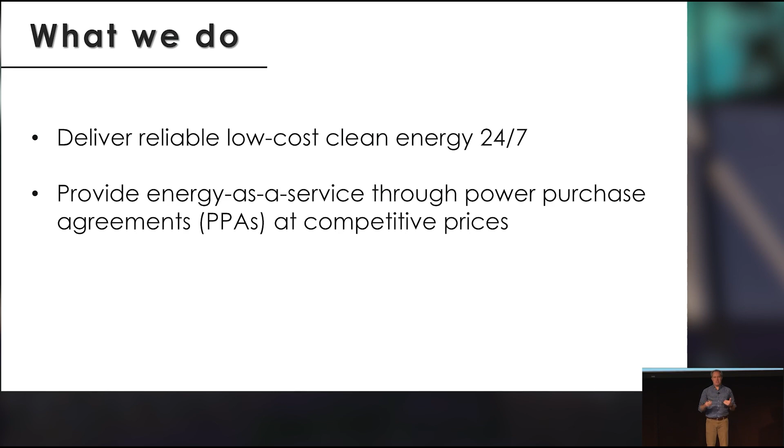At the, I don't know if I'd say 100,000 foot view, maybe that's a way to think about this because it's a multi-billion year perspective. What we're working on is literally a technology that's been demonstrated and proven that can tap into known reserves of heavy metals that we can access on this planet, in other words, uranium and thorium, and power the entire planet's energy needs for billions of years, for the rest of the durable lifetime of the planet till the sun consumes it or makes it uninhabitable. That's pretty dang cool, right? We don't need a breakthrough. This has been done. So it's just a matter of actually execution. Now, that's a little bit reductionist, but that is the mission that motivates us and what we're working towards.

So what got me to fall in love with this, I talked about, was energy density. Just to manifest 50 million times, cool, but to manifest this a little more clearly, if you had a golf ball of uranium metal, that would have enough energy content in it with what we're doing to power your entire life's energy needs. Just a golf ball, right? And this stuff is pretty abundant material, actually. It's not that rare. So it's a hugely powerful source that also sets the stage for this to be such a competitive advantage we have from a technological perspective, from a density perspective. My view is, generally speaking, humans have tended to climb density curves in everything we do. Well, at least when we make progress. Maybe there's short starts and stops where we don't, but usually that's what we do. Semiconductors are obviously probably the fastest growth we've seen of that.

But probably the only other thing that's rivaled that is the shift from the electron cloud, which is what we get our energy from for everything else, into the strong nuclear force. That's in the nucleus, which is what nuclear taps into.

To me, the way I think about that, that manifests in what I think is the most fundamental metric for energy economics, which is life cycle material usage. How many kilograms of concrete, steel, copper, fuel, and so on do you need per gigawatt hour of energy you produce over its life cycle?

If you compare across all energy sources, fission by far requires the least. In fact, you really have to zoom in to see how much better it is than everything else. And that's great. In fact, it even beats fusion. That's not to be super critical of fusion, it's just fission is a really, really easy way to make heat, and you can harness it. So it really is one of the most sustainable energy sources there is.

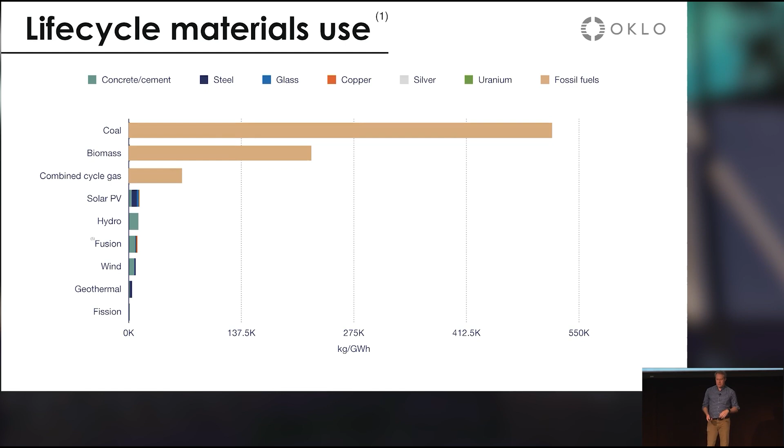And scalable, and therefore economic, is how I look at it. So that's what got me to fall in love with it, and that's what got us to work on this. So I talked about this before, I kind of talked about the macro, setting the stage.

When we started the company, we really focused on targeting three main areas where we saw huge opportunities. One was the power sales model - that's a business model different than what's been done before. The other is technology, and the other is size. So quickly working through those.

Typical nuclear that we had seen, and to date pretty much what everyone else does in the nuclear space on the reactor design side, is they design a nuclear reactor to about 80% completion, design the rest of the power plant to about 50% completion, maybe a little more. And then they go to their customers or prospective customers and ask them to pay a couple hundred million dollars for the customer to then take over all the work.

For the customer to do the rest of the design, to site it, to permit it, to own it, build it, operate it, all those things. That's really highly frictional and is part of the reason nuclear has not had a good time finding new markets to deploy into and growing even within utility markets. So our view was to say, let's make it easy to buy what people want, because people really do want the reliable, clean power that nuclear produces.

So we decided to focus on a power sales model where we design, own, and operate the plants and sell power through long-term power purchase agreements. This draws on parallels from renewables and other energy fields. Most importantly, though, it's what we found customers want. It also has a lot of other benefits - it helps us have recurring revenues, we can project finance against it, it gives us all sorts of things that really help us scale more quickly.

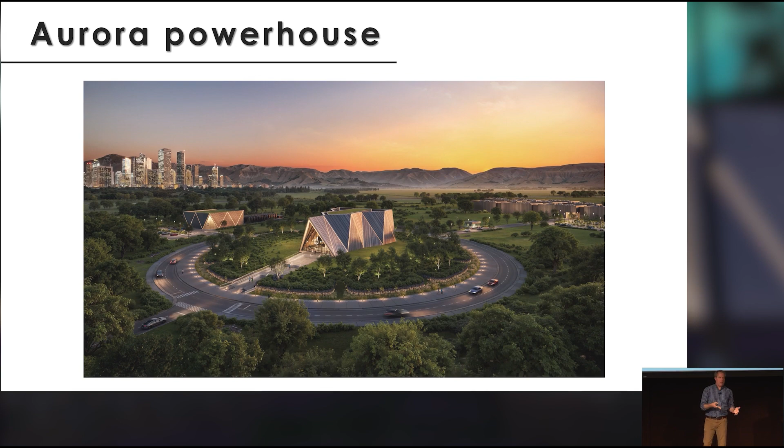So what we're working on, this plant, is what we call the Aurora Powerhouse. We draw that name from other energy sources where you're generating power from a building and call it a powerhouse—we've seen this in diesel and gas and other energy fields. In this case, we have a little reactor that produces heat which we turn into electric power. So that's a high-level view.

The plants come in two sizes we offer: 15 megawatts and 50 megawatts. They sit on a relatively small piece of land. The 50 megawatt version takes a little less than 2 acres, but generally speaking it's a small plot of land you need to build these plants.

The total capital needed is quite approachable—looking at about $70 million for the 15 megawatt plant for early units. Those numbers drop with time and scale, and about $116 million for the 50 megawatt plant, which will also drop with time and scale as we grow. When I say scale, I mean volume of deployment.

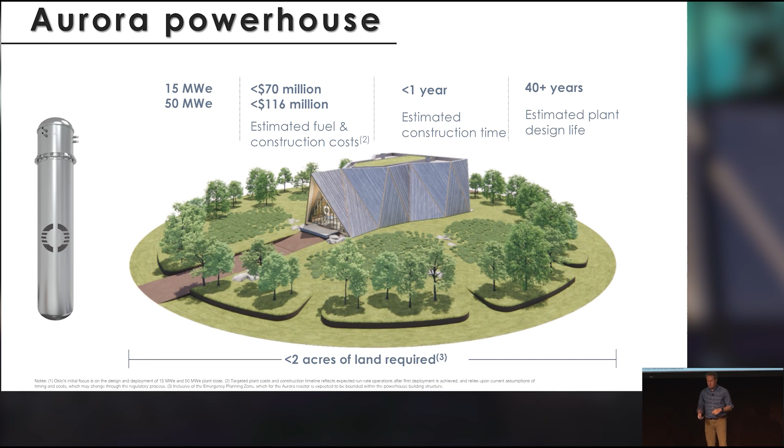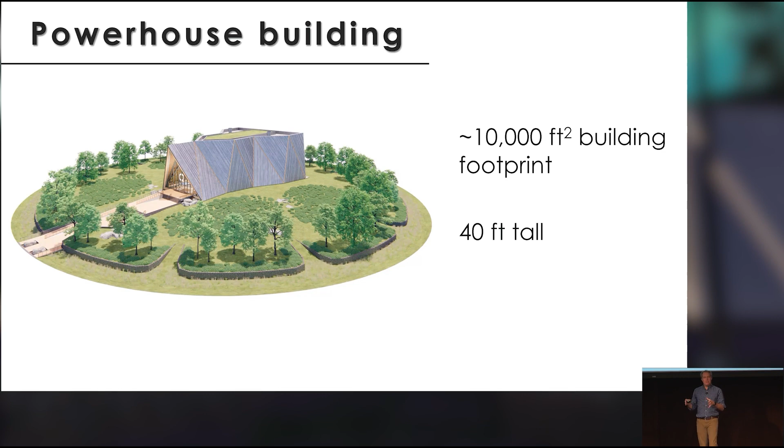Being small also reduces construction timeframes, allows you to prefabricate a lot of things in a factory environment, ship in optimal packages, and reduce in-field integration points—making it easier and simpler. The plant can run for 40-plus years, and you refuel these things every 10 years or so, depending on specific customer requirements. The building generally fits on a pretty small footprint, which simplifies the build process. Building a massive mega project is a lot harder than building a 10,000 square foot building, so there's a scope limitation that caps what the overall project can look like—and that's hugely important for cost.

Now diving into the heart and soul of this thing, the reactor, which gets me very excited. This is a small, fast reactor technology that leverages a long history of technology development. What I mean is a system that uses liquid metal as a coolant—like liquid sodium. It looks like that if you've seen Terminator 2, like the Terminator dude—it's not sentient or a dangerous robot, so don't think about that. It's just a liquid metal coolant that's really good at moving heat.

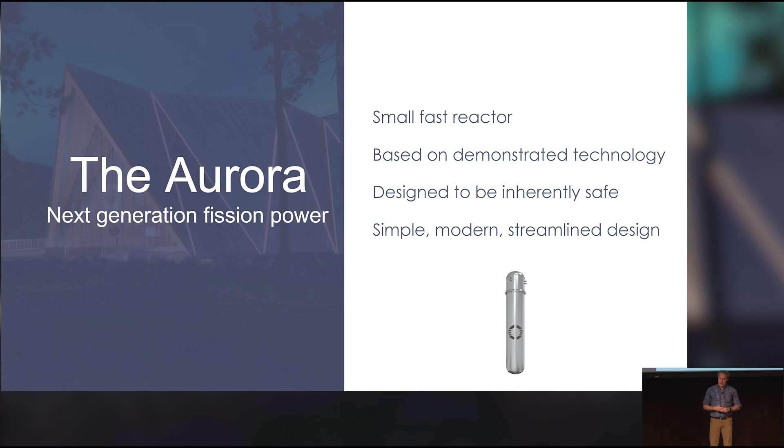This was envisioned by Enrico Fermi and his peers coming out of the Manhattan Project. They liked it because liquid sodium is so good at moving heat and operating at high temperatures that it opens up very favorable characteristics from a plant design perspective—allowing you to run at high temperatures without being pressurized, and it's chemically compatible with commonly used stainless alloys like 304L, 316L, used in many other industries and supply chains. We know it works because we've built a lot of these things. Diving into the system, there are a couple of factors that lend themselves to this best-of-breed economic capability.

First, not being pressurized and designing at a small size allows you to leverage all the benefits that small prefabricated non-pressurized componentry can afford you. Being able to use existing materials that other industries use, often oil and gas, is a huge opportunity to tap into the supply and value chains in oil and gas to use these kinds of components.

At a simplistic, reductionist level, this is basically a 50,000 gallon carbon steel tank. It's a double vessel system holding an internal 35,000 gallon stainless 304L tank with some relatively internal stainless structure and mounts inside, and then a nuclear fuel core at the bottom. Those are all things that look very common to what other industries use.

This was important for us. We avoided what nuclear tends to do, which is overcomplicate, academic, overly academify things - I don't know if that's right, that's a made-up word - but make up a much more complex design space because it's interesting, but it's not actually buildable. We focus on making this buildable.

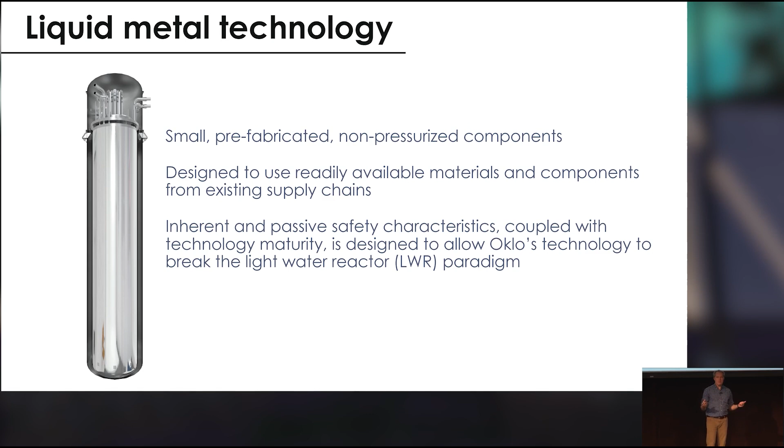On top of that, liquid sodium, because of the benefits it has and because of the benefits of what a fast reactor is, allows you to have these great inherent safety features where the system's self-stabilizing and self-cooling. That allows you to simplify the plant design and strip out these backup cooling systems and backup-to-backup cooling systems that you would otherwise see. You're just relying on natural forces like gravity, thermal expansion, thermal conduction and thermal convection - things that are frankly free to have in the system. That's a major way to reduce cost.

So how it works - this is a cutaway view of what our reactor looks like if you were to cut the vessel down the middle in half. In the lower part is where you have fuel. That fuel is uranium zirconium alloy. It's held in fuel rods that are basically the diameter of my pinky, about 8 feet tall, and there's about 7,000 of them arranged in a hexagonal honeycomb pattern.

Between those you have a little spacing, and that's where the liquid sodium flows, and it cools the fuel. Because in the fuel, when you're splitting the atoms, you're producing heat - energy, mostly as heat - and that heat is conducted through the fuel to the sodium that's cooling it, flowing on the outside of it. That sodium then flows up.

It then flows down through heat exchangers that are at the top there. You see pipes coming out on the top. That's basically a second independent loop of sodium that's cooling the reactor. That internal sodium, the sodium that flows between the fuel, basically through heat exchanger tubes, cools off and then flows back down to the bottom of the vessel and completes that loop that way.

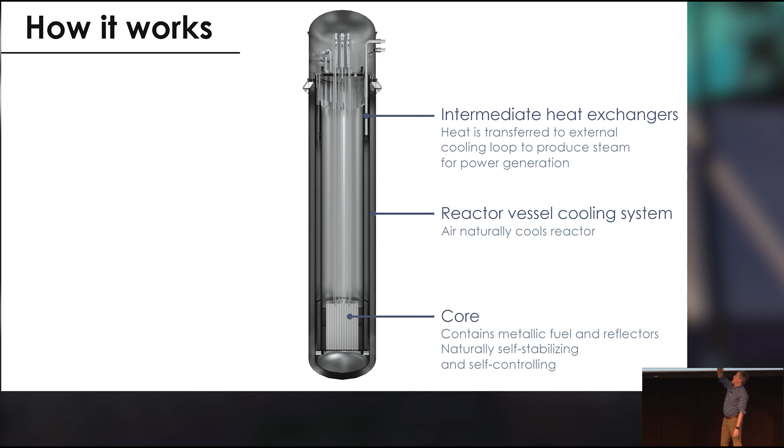You also have control structures, things that can drive power and control the power in the reactor, and some other instrumentation that you see on the top there. But overall, it's a relatively simple heat loop that produces heat on the bottom, transfers its heat at the top to a second loop of sodium that then goes and transfers its heat off to boil water, make steam and spin a turbine.

But on top of that, what's really cool is the system can also achieve all the heat removal it really needs just by the natural flow of air around the vessel. In a nuclear reactor, one of the things you have to design for is the ability to constantly remove heat, because when you turn off a nuclear reactor, you don't actually turn it off.

It's still producing heat through the decay of the byproducts of the fission process. When you split an atom, you usually produce two smaller atoms. They're radioactive, they're unstable, and as they decay, they're releasing energy. Most of that is manifest as heat, so you have to remove it. It's a small amount and it decays away exponentially, but you have to manage it.

And it's enough of a thing that most of the events that have caused negative headlines and accidents in the nuclear space have been caused by the mismanagement of that decay heat. So it's great if you can manage that completely naturally just by air that's naturally flowing around the vessel, which we can do. The reason we can do that is because we operate at higher temperatures - heat transfer to air is ultimately dictated by the difference in temperature between the hot surface and the temperature of the air.

The greater that difference, the more heat you can remove. You can do that in this system because we're running at higher temperatures and we're not pressurized, so we have thinner componentry. Water reactors can't operate at those temperatures to do that economically. So that's a great thing about these advanced reactors. That allows you to strip out a ton of things you would otherwise have in the plant to keep costs lower, but also basically put safety in a completely natural way on the side of a physics-safe system. I like to say physics is really on our side here, which is not always the case in a lot of engineering, so it's kind of nice when you have that.

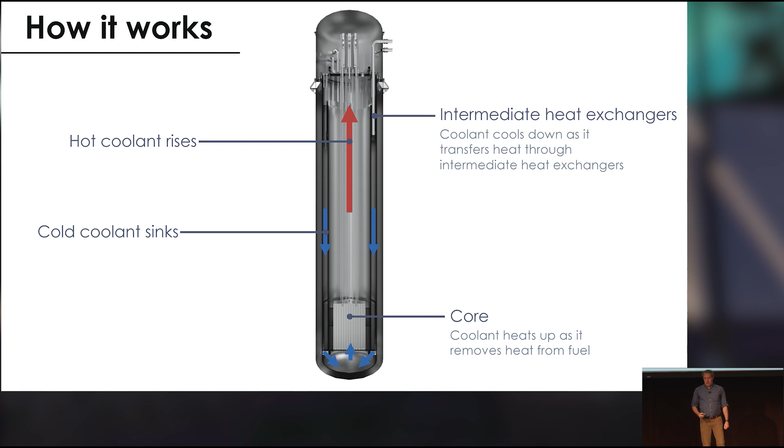So we talked about the flow of the coolant. I'm a big repetitive learner, so I tend to say things multiple times over. But basically, the way this works is that the internal sodium loop flows and enters the fuel at about 350 centigrade and exits the fuel at about 550 centigrade. That's the temperature range in which it operates.

And then those intermediate heat exchangers are where the heat's transferred to that separate loop of sodium, runs it a little lower, and then that boils the water like I talked about.

So the way the airflow naturally cools the system is that there's air always around this vessel, and as it flows up the vessel, it does pick up heat. It gets hotter and rises, just as hot liquids and hot things tend to rise through buoyant forces. In doing so, it pulls cool air behind it. And that natural flow is always on. So you're always losing a little bit of heat, but it's a really small price to pay for all the benefits you get, which is tremendously important.

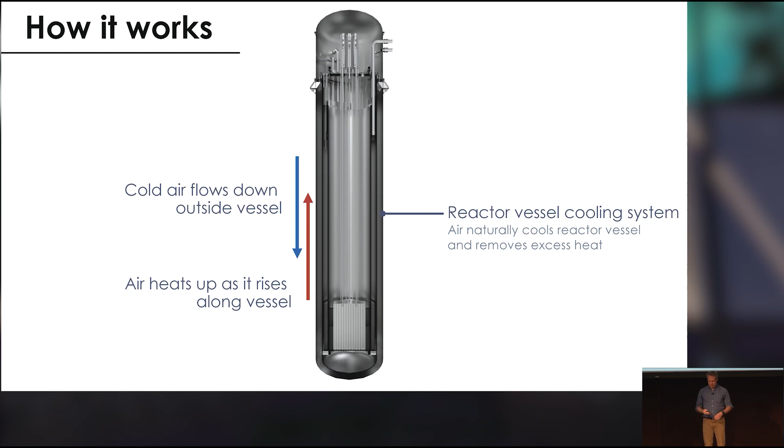So from that intermediate loop of sodium I talked about, that's a separate loop of sodium that carries heat from those heat exchangers to basically these boilers and superheaters. That is all basically a skidded up design that looks very similar to what many other industries use for heat exchange processes. And then the steam goes to a power conversion system.

We've been very excited about a partnership we developed with Siemens Energy. Siemens makes some of the best steam turbines in the world. They exited nuclear in 2011, saying there was no more business or work they wanted to do there. But they saw that wasn't necessarily a wise decision—it was very reactionary and partly driven by their home country's views. What they realized was there was a lot of opportunity with these new nuclear systems going forward. So we were excited that we were their first announced partner to enter back into nuclear, back late last year, and an announcement we had with a partnership there that we're very excited about as a preferred supplier on the steam turbine side.

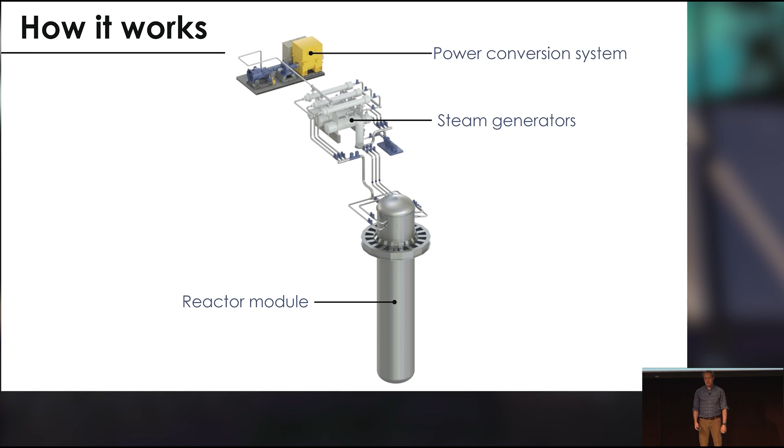What's great about that is they provide the services to design, build, and own these things, help service, and they have a huge amount of data because these steam systems look almost identical to what they do on fossil-fired systems of the same conditions. And that's a really cool thing—we produce steam at very similar conditions that fossil-fired systems do. That's not true for most nuclear systems that operate at lower temperatures, so that gives us a lot of benefit there.

And one thing that's really cool about this stuff is it's proven technology. So all those great benefits, all these things are really neat to say, but it's really, really important because it's not just cool to talk about—it's been done. There's over 400 reactor years of combined experience for fast reactors.

By the way, I said fast reactor a couple times without exactly explaining it. Basically, when you split an atom, you produce 2 or 3 neutrons every time that happens. Those neutrons are born going very, very fast, about 10,000 miles per second. What we do is tend to slow those down to make them easier to catch by the fuel by bouncing them off light things like hydrogen and water or carbon and graphite. That's how today's reactors largely work. But you can let them just run as they are, fast.

The downside is that you need more fuel, but the upside is when you let them run fast, they're much harder to intercept by the byproducts of the reactor or impurities in the reactor. That gives you a lot more leeway and flexibility, and opportunity to take advantage of cool things fast reactors can do, like use fuel much more efficiently and even recycle waste, which is really cool.

This technology has a long history behind it. In fact, the very first usable power ever made in the U.S. was from a small fast reactor in Idaho in 1951. The world has built more than 25 of these plants, and we specifically build off the legacy of successful demonstration of this technology, after people who came before us iterated through what doesn't work and what does work, successfully culminating in two major demonstrations in the U.S., one in Washington State, and this one in Idaho that we build off of. This is the plant we most specifically drive our lineage from.

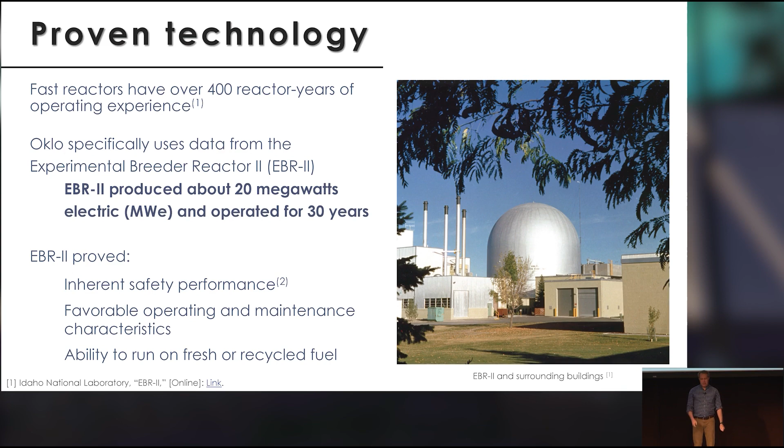So I'll talk more about that and the safety side before handing it over to Brian to talk more about the opportunity we see. So on the safety side, I talked a little bit about this, but just to get really specific, because it's kind of important here.

What's great about this system is it's a physics-safe design that's self-stabilizing and self-cooling. What that means is that the reactor heats up, the fuel thermally expands, pushing itself further apart from itself, causing more neutrons to leave the core, get absorbed in shielding around the reactor, and shut itself down naturally. That's a great feature to have.

On top of that, sodium is actually quite good at naturally flowing through the fuel and removing all the heat through those same physics of natural convection that I talked about with the air. So the sodium does that inside the vessel and then transfers its heat to the air outside the vessel.

This was all done before. This isn't new. EBR2 did all of this, as well as a cousin plant in Washington called FFTF. Nuclear names are terrible, that's why we call it the Aurora and not some acronym. But all these plants did these amazing things, and you don't need pumps, you don't need power, you don't need anything. All you need is the physics that are freely available to you.

This is actually something that has been demonstrated at full scale, which is really important. EBR2, specifically on April 3rd, 1986, demonstrated this by going through two real-world tests, basically going through accident scenarios that would catastrophically destroy any of today's plants — way worse than what Fukushima was.

What it did was in the morning, they put the reactor up at full power. They locked the control rods out of the reactor, which are the things you normally would put in to shut it down, and they turned off the pumps. That causes you to not have the ability to cool the fuel actively anymore, which would cause the fuel to overheat. Well, that's exactly what happened, but the fuel overheated, expanded, pushed itself apart, shut itself down naturally, kicked into a natural circulation mode, and rejected all its heat naturally without a scratch.

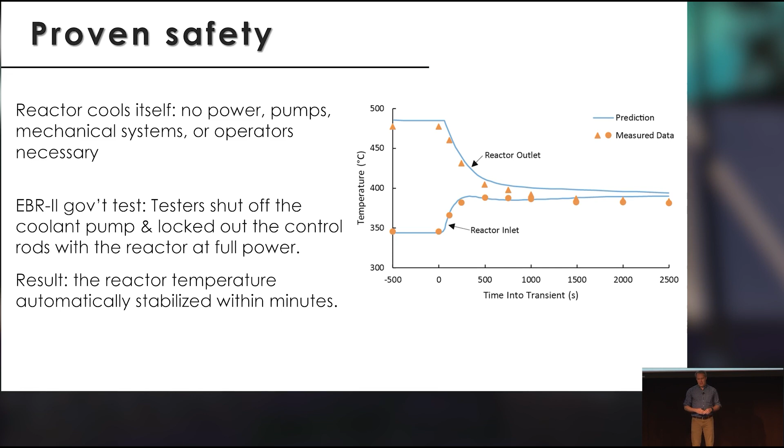To put it simply, there's a long history we could talk about, but it's because the industry did what it typically does. It took this great technology and put it through the same traps it's used to running—bad business model, putting a lot of new technology into it just to keep eligible for research and development funding. It just lost the opportunity here. I know this because I worked on this technology at GE when they were working on it. So that's why we focused on staying close to what's been done before and scaling it accordingly from there.

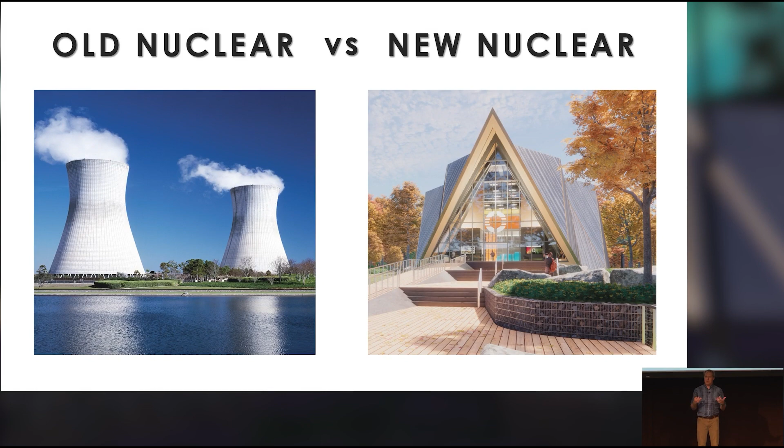So this presents a very different paradigm in the world from what's been done before. First of all, you have all these great features of being small. You have all these great benefits of a different sort of business model. It changes the transactional approach and makes it easier for customers to build. You have simpler plants that leverage existing supply chains with known materials, because we've invested a lot of great effort and research with some of the best minds that have ever existed in these technologies, coming out of the Manhattan Project. Now we're just taking a different approach on how we can actually bring these things to market.

One of the really cool things is on the waste side—with these next generation technologies you can recycle it. That's the last thing I'll say before I hand it over to Brian. This is one of the things that gets me very excited, because when I think about resource efficiency, nuclear plants are really not good at that. They're just blessed by having a very energy dense fuel.

What I mean is, imagine if you ran your car but had to dump your gas tank out after only using 5% of it. It makes no sense, but that's just the way the system is built. That's what today's reactors do with fuel. In fact, all reactors are kind of limited—they only use about 5% of the energy content that goes into them, and then at the end you have to take that fuel out and replenish it. So that used fuel is basically 95% unused fuel. That's a huge amount of material you can pull out through recycling and actually use in a reactor system.

The thing is, you can only do that if you have fast neutrons, because you're impervious to those impurities, and they have enough energy to change some of the nuclear physics of these isotopes. That allows you to tap into this massive opportunity we consider waste right now and extract tremendous amounts of power. You can take a recycling approach where you take the unused fuel out, reconstitute it, put it into our reactors, and literally produce enough energy from today's waste inventories in the United States to power the entire country's electric needs for 150 years. And every year our operating plants produce enough waste to power the country for 4 more years. So it's a pretty inexhaustible resource, something we're pretty excited to tap into.

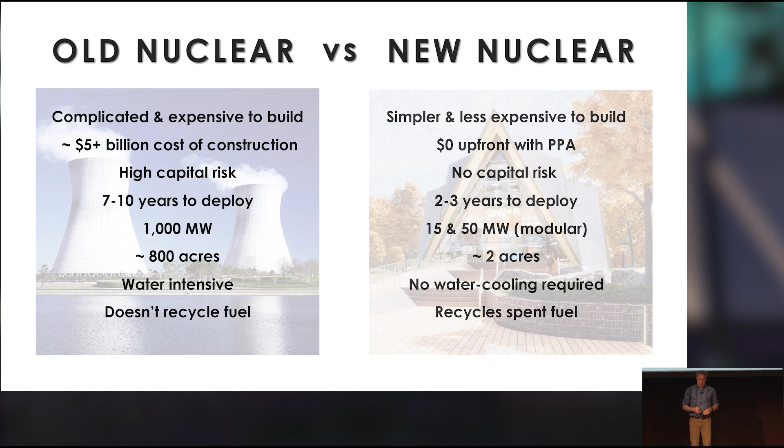That's kind of the story about what started the company, how we thought of it, how we started it, what we're delivering. One of the things we've been very excited about, now almost coming up on 2 years, we've had Brian Gitt on our team, leading our business development, and he's found that this is a very exciting moment for what we're developing and designing from a product and business model side to meet the future of where we see energy consumption and demand going. So with that, Brian, I'm going to turn it over to you to talk through your story and all the things you're seeing happening.

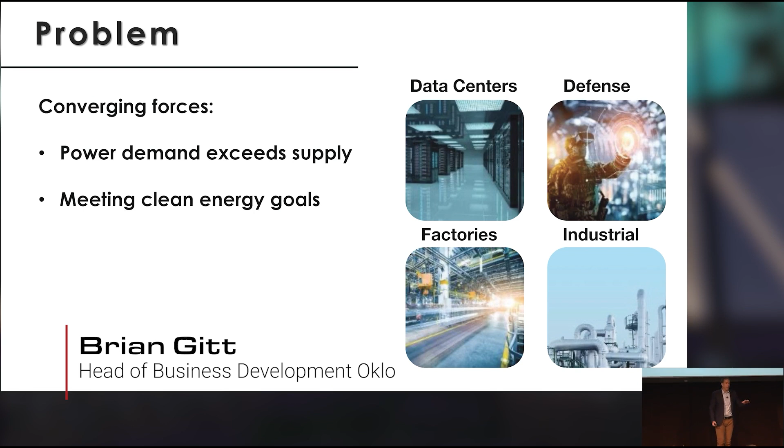By a show of hands, how many folks here work in the energy industry, whether that's oil and gas or utilities? Oh my gosh, almost everyone. Well, I'm going to tell you something you don't hear very often. Thank you, I am so grateful.

I know you guys don't hear this enough, but honestly, everything that we care about in our lives is enabled by you and what you do every day. I really want to express my gratitude for that, and we don't do that enough, we take this for granted. So thank you so much for not only the work you do but for being here, and we're really excited because we are moving and shifting into this new unprecedented era.

And energy is so fundamental, as Chris opened up with. It's so important. When we think about what is energy, right? Of course it's the capacity to do work that you'd see in a physics textbook, but it's way more than that. I think a clear, expanded definition is: energy is freedom. And that's why Liberty Energy is the most perfect name of any company I could ever think of in energy, because it's freedom. It's freedom from cold, freedom from darkness, freedom from hunger. It liberates us from domestic drudgery, from drinking dirty water, from suffering. It enables everything we care about in healthcare and education. And when you choke off energy, you choke off freedom. This is really critical.

And that's why I work at Oklo. That's why I've worked in the energy industry for the last 25 years, because this is not only fascinating to me, an endless learning opportunity, but it's so fundamentally important to all of our lives.

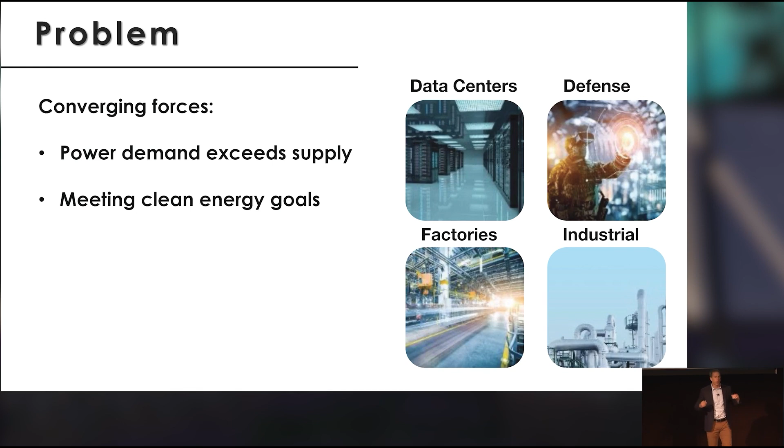There are two large converging forces that are smashing together right now. First, over the last 20 years, power demand in the United States has been relatively flat, it hasn't grown a lot. And all of a sudden we're seeing a massive surge in demand. At the same time, we're having all of these large Fortune 500 companies - I'm sure many of you in this room - with very aggressive emission reduction goals, as well as government agencies. Everyone knows this, right? Well, these two forces are crashing together all at the same time and creating so much scarcity. Just to level set this and give you an idea what we're talking about.

Now there's a ton of data - you can talk to McKinsey, Boston Consulting Group, all these organizations - but they all say basically the same thing: we're going to essentially triple the amount of electricity consumed just in data centers alone by 2030, and some estimates are more than that. In the United States today, we use about 20 gigawatts of power for data centers, and it's going to be about 60 to 70 gigawatts by 2030. Personally, based on my conversations with many of these companies every day, I think it's going to be more than that - I think we're underestimating it. That's the equivalent of about 40 million homes. That is an incredible amount of power. And that's just data centers.

Factories in the United States - almost nearly $500 billion has been committed to build new factories and industrial infrastructure in the United States. Well, that's also going to require a tremendous amount of energy. And what we've seen is all of these large companies, whether it's Google, Microsoft, Amazon - all of these companies are going around the country in land grabs, basically soaking up all the additional power they can get.

They're buying any infrastructure they can get next to a substation or all land, trying to claim that power.

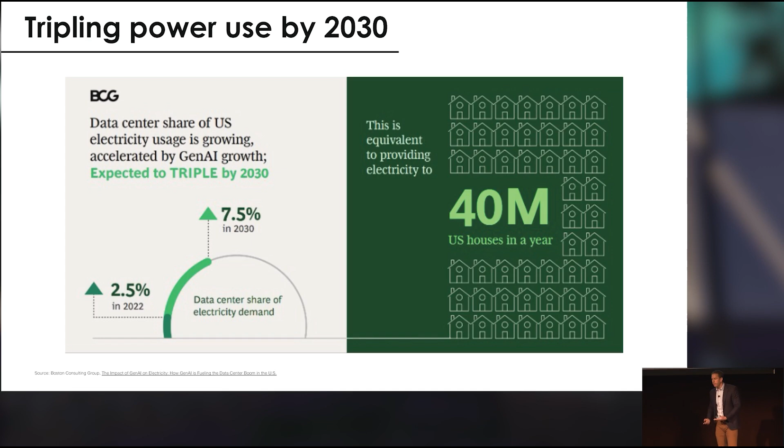Now when we think, okay, what are we going to do? We have all of this surging demand, we have all of these clean energy goals, we need to reduce our emissions. At the same time, what are the solutions to this?

New transmission lines, as many of you are aware, take forever. It can take 10 years or more to build. So that's clearly going to be a bottleneck in the process.

As many of you are probably aware, the EPA issued a new power plant rule a few weeks ago. This is going to force premature retirement of many of our thermal power plants in the United States. About 16% of the power plants are coal today, and many of the new natural gas plants that this rule will impact will require carbon capture and storage by 2032, which is going to increase the cost dramatically. So a lot of our thermal power plants are going to be shut down.

We're certainly not going to build more coal plants, I can guarantee you that. Wind and solar are great in terms of not emitting any emissions, but they require transmission. You're not going to be able to triple the size of the electrical grid, which is what the Department of Energy estimates we'd need to deploy solar and wind at scale, because those resources are built in far out areas away from our homes and businesses. So you need to build the power lines. Well, we just said it's going to take over 10 years, best case, to build all that power infrastructure.

Large nuclear plants are amazing assets for the United States. We have 94 operating nuclear reactors. We think at Oklo we should build lots more large nuclear plants as well. We're very pro large nuclear plants.

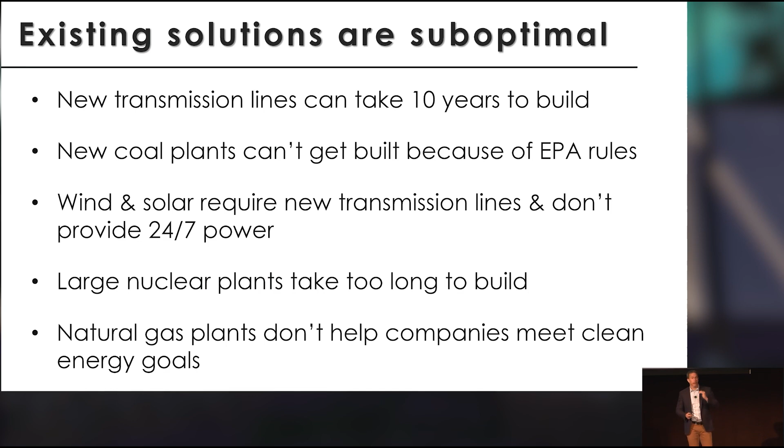Now, natural gas plants are a clean burning fuel, and many of you support that, obviously. I think we should build a lot of natural gas plants ultimately. However, what you and I think ultimately doesn't even matter, in the sense that many of these Fortune 500 companies like Google, Microsoft, and Amazon have very strict emission reduction goals, and unfortunately they don't consider natural gas a clean energy resource. So it doesn't count towards that metric.

So what is the solution? Well, obviously we're biased—we think that advanced reactors and this smaller approach is the solution. Historically, the industry has really faced three big challenges, and Jake hit on some of these in terms of how we've overcome them in the design. The first is high upfront costs—this has really historically plagued the nuclear power industry. Long build times, and then safety concerns.

Now, arguably the nuclear industry is one of the safest industries on Earth, both for occupational worker safety as well as community safety. In 70 years of commercial operation in the United States, there's been one accident and no one was hurt. The amount of radiation released at Three Mile Island is equivalent to going on a hike in the Rocky Mountains. So what are we even talking about when we're talking about the safety concerns?

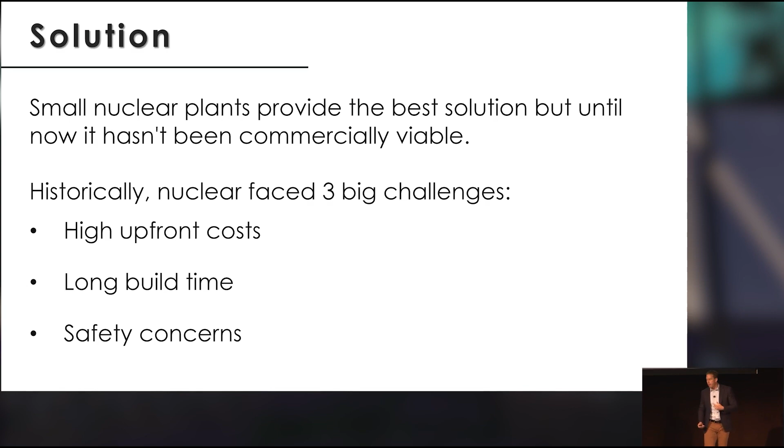But we have to bring people along—we've got to educate them and really engage these stakeholders. So as Jake alluded to, the entire genesis of Oklo was to solve these big challenges. How do you overcome them? How do you build plants that are cost efficient, quick to build, and publicly accepted?

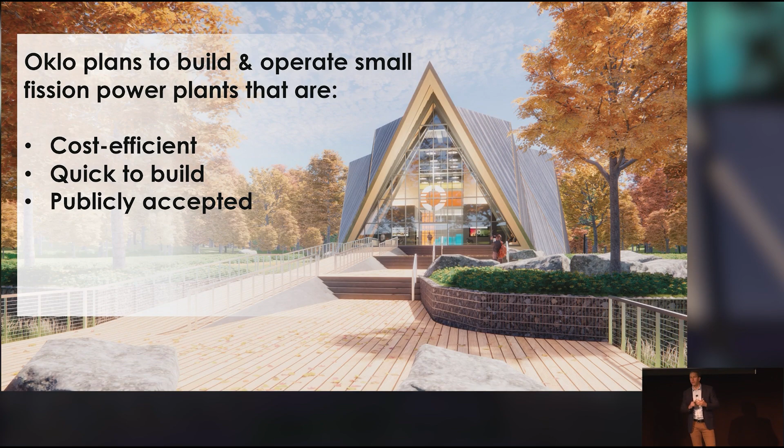I'm not going to go through all the nuance here, but I do want to highlight a few things. So when we talk about speed, what are we talking about? Well, business models change industries—we saw this with Amazon, Amazon Web Services.

When they started to offer compute as a service, before that, if you were a Fortune 500 company with on-premise servers, you had to invest a bunch of capital to buy servers, hire people to configure, test, operate, and eventually replace them. That takes a lot of time, resources, and effort.

All of a sudden, Amazon said, what if we just offer compute as a service? You don't have to expend all that capital and labor, you can just sign up and instantly access compute on demand. That is very similar to what Oklo is doing for electricity and industrial heat. We are offering energy as a service to a whole new cohort of customers that couldn't access this before.

Utilities were really the only customer for nuclear power in the past. If you were a data center or a factory or an industrial site, you couldn't just access nuclear power and the qualities of this energy. This business model, I believe, is going to completely and radically transform the industry, similar to how AWS transformed cloud services.

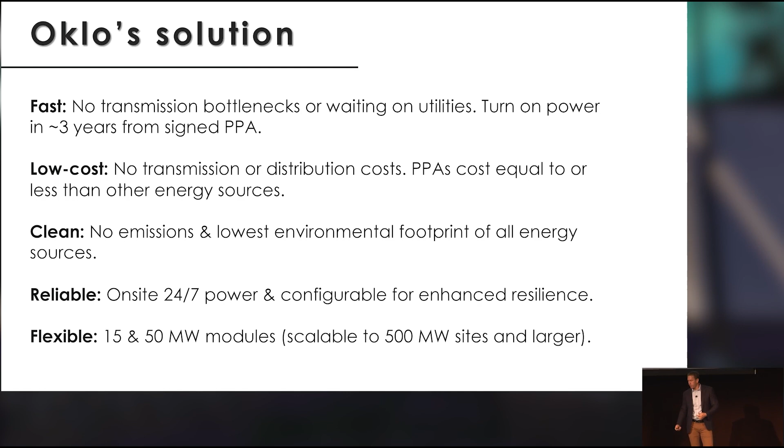24/7 clean energy is incredibly in demand, and Jake talked about some aspects of it—obviously it has to be flexible and reliable, etc. So we have some exciting traction with customers, and that's what I want to get into a little bit more.

We recently signed an LOI with Diamondback Energy for an initial deployment in the Permian Basin. We did a similar event to this in Midland in the fall of last year, thanks to Chris and team. Through that we made some amazing connections, and this is just the first of several announcements coming out soon with traction in oil and gas.

Because as you all know, you've got to reduce emissions. The Permian Basin is going to need 3 to 4x the amount of electricity as you electrify all the frac fleets, compression, and various aspects of operations. So this is a tool to help the oil and gas industry reduce emissions.

Data centers are our number one category. We're really excited about this partnership with Equinix. If you don't know, Equinix is the largest co-location data center company in the world—the number one, they're huge. There are 250 or so data centers around the world. Co-location data centers basically means they build massive buildings with lots of servers in them, and then lease out the space to a number of different parties to operate within their buildings.

When we talk about impact, energy density is the cornerstone of all of this. When you compare the materials intensity and land intensity of advanced nuclear and nuclear in general with all the other energy sources, it just wins hands down.

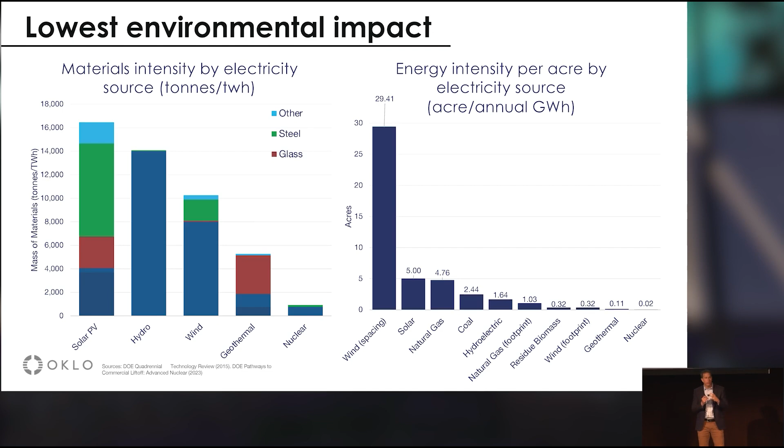Now what if Oklo deployed our advanced reactors to do that same 5 gigawatts? 200 acres versus 200,000 acres. When you talk about environmental footprint, think about all the materials, all the diesel fuel, all the moving of parts and components, the installation, the land impact, and the disposal and waste of all of that.

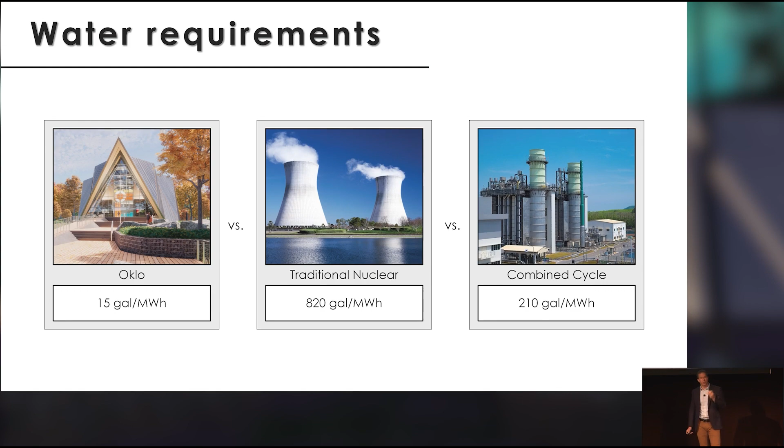Water is becoming more and more of an acute issue. We use liquid metal as our coolant, so we don't use any water for cooling. We do use some water because we have a Rankine-style steam turbine, so we need make-up water for that turbine, but it's about 15 gallons a megawatt hour. Compared to a combined cycle natural gas plant or a traditional nuclear plant, it's orders of magnitude different. A solar farm in Arizona would use 20 gallons a megawatt hour just to clean the dirt and debris off the panels. So it's about the amount of a shower running, 2 gallons a minute, that one of these is using.

So we talked about that analogy with SpaceX, and it's really important to think from first principles about what it actually takes. All these design decisions matter a lot. The fact that we operate at fossil-fired temperatures means we can partner with Siemens and use an off-the-shelf steam turbine and power conversion system. Some of our competitors have massive customized bespoke pressure vessels that have to be forged in South Korea. That's a very different design decision with huge cost implications. And the fact that we're non-pressurized means you don't have to have all of those parts and components rated for a certain pressure. All of these things make a huge difference.

We're basically taking what was a lot of unproductive, low-productivity labor in a construction environment and pulling as much of that into a factory as we possibly can. We obviously have some civil works, but nothing on the same scale as light water reactors. In fact, many small modular reactors that use light water actually use more concrete and steel per megawatt hour than even the large plants, because they're shrinking down the plant but still using so much concrete and steel. That's unfortunately where a lot of the cost overruns historically have shown up, in the civil works, the concrete and steel. If you can limit that, you save a lot of money.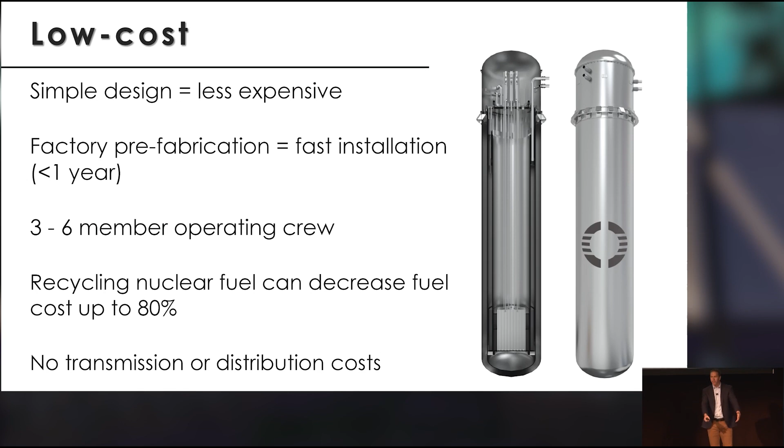And now, because you can co-locate right next to the data center or right next to the factory, oftentimes 40% of their energy costs are just getting the power. It's the transmission and distribution costs and all of the associated services to get the power from the power plant to the data center. Well, we just cut their bill by 40% just by showing up, just by siting right there. So there's huge cost advantages to this approach.

Now, the build time is really critical. So how do we do this? Well, one of the ways is the business model enables a different licensing approach. Instead of the traditional two-step process, where traditionally in the nuclear industry a designer, a reactor vendor, technology vendor would get their design and construction license through the Nuclear Regulatory Commission, and then the customer would have to go back through that process to get an operational license and all the site-specific details approved, because of our business model, because we design, build, and operate, we can do it in one step, what normally would take 2 steps. It's a huge advantage in terms of time.

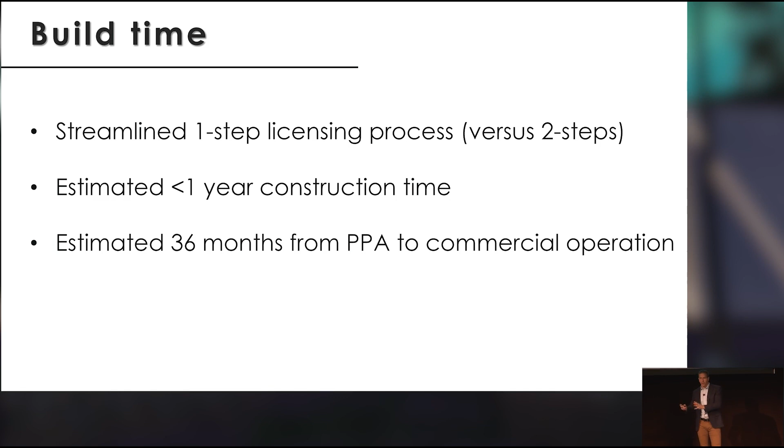And because we are producing a standardized product that is basically stamped out over and over and over again, the Nuclear Regulatory Commission will only look at what is new and different for a deployment. So effectively, 90% of our license applications after the first one are a copy and paste exercise. Now, you're always going to have differences of a site, right? That 10% difference, does it have wetlands? Are there endangered species on that site? Is there historic preservation issues? All of these things are important to consider, but it's much easier. Any development project needs to deal with those things.

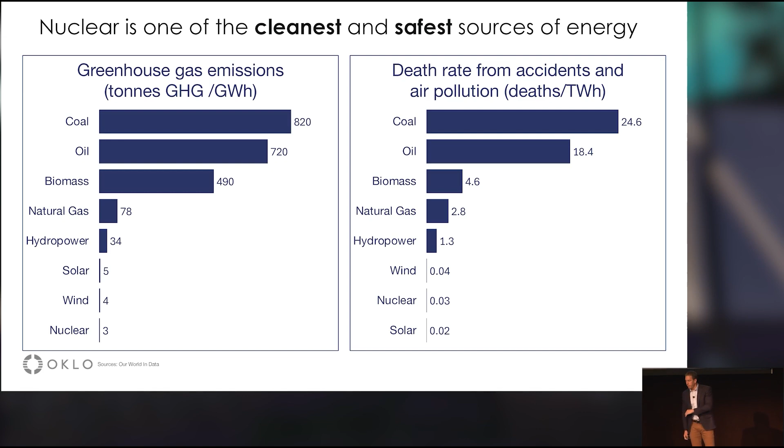So we talked about the emissions profile. Obviously, greenhouse gas emissions are driving a lot of the policy. And when you look at the profile of nuclear, nothing beats nuclear power in terms of the life cycle CO2 emissions of a plant. And even if you look at the data from a safety perspective, it's one of the safest ways to generate electricity.

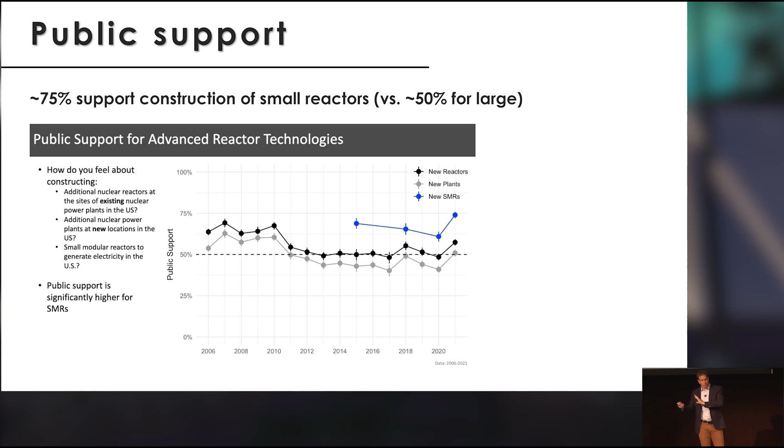There's been a surge in public support for this. I think part of this is that people don't like massive infrastructure in their backyard. The fact that these are smaller, that they have the safety profile they do, and they don't intrude visually on the community. But 75% of Americans support smaller nuclear plants in comparison to only 50% for large plants.

There's a bunch of companies in this ecosystem, which we think is a good thing. We think we need a healthy ecosystem of companies that are all working to tackle different parts of the problem, because these are really solving different problems. So, for example, NuScale and X Energy and TerraPower, they're building much, much larger plants. Those are 350 megawatts and up is kind of their sweet spot in what they're targeting. Mostly they're trying to replace coal plants. But they're not going to be appropriate for things that are 50 megawatts, like what we're doing in the Permian Basin with Diamondback, 50 megawatts. It would be totally inappropriate to put one of these larger plants on that site.

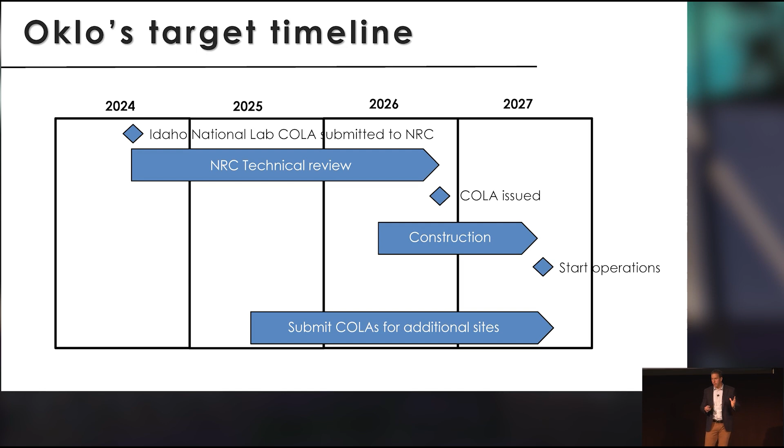So our timeline, this comes up, well, when is this going to happen? So we're looking to have our first commercial operated plant by end of 2027. Jake mentioned it, at Idaho National Lab is what we're looking at for our first deployment. However, we're going to be submitting multiple applications to the Nuclear Regulatory Commission over the next 12 to 24 months for a whole series of projects. There's a very large pipeline of projects that has been growing, and we're really excited to start rolling this out.

So just real quickly, and then we'll get into your questions, in terms of how do we actually work with customers, we work with Diamondback or Equinix or some of these other companies. How does that process, what does that actually look like? So the first thing is we identify site, understand is there land available, or do we need to buy adjacent land or nearby land to power that site? What are the power requirements? What are the resiliency requirements? We then can develop budgetary pricing relatively quickly. In about a week, we can develop a budget once we have those few inputs. Then we sign a non-binding letter of intent. That enables us to commit more engineering resources and really think about where we would place these powerhouses on the site, how we interconnect to the grid if necessary, or to the load. And then ultimately we look to sign a power purchase agreement. So that's kind of our process of how we typically work with customers.